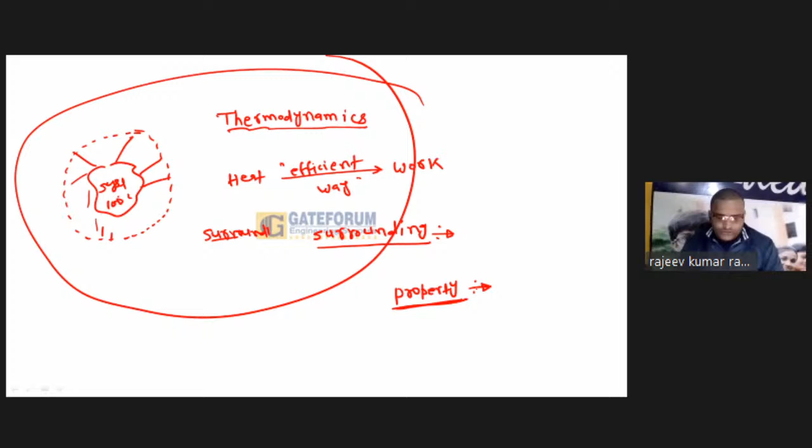No. So my dear friends, from today onwards, what you have to tell is that only those characteristics of a system which can be measured are properties. If a thing cannot be measured, it can't be a property of a system, or an engineering property. Yes, it is their property, but not an engineering property. So this thing you have to keep in mind: the characteristics which can be measured of a system are their property.

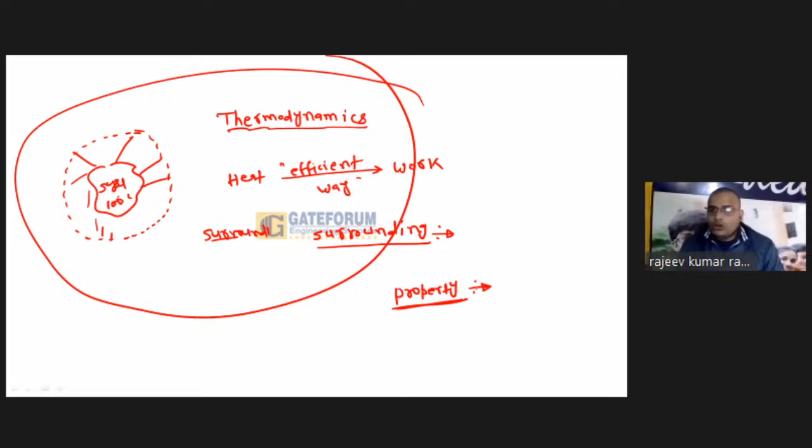So three things you can't measure: you can't measure taste, you can't measure smell, you can't measure color. So these three are not a property. Okay, you can measure temperature, pressure, volume, mass, enthalpy, entropy. Anything you can measure, all of that is property. Hopefully this is cleared.

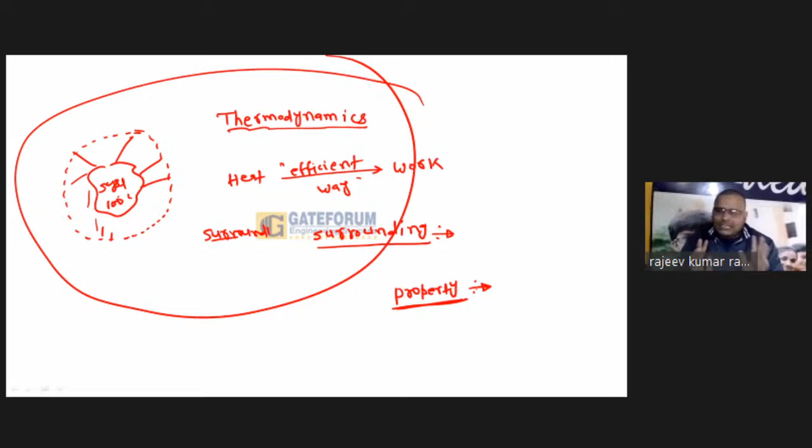So my dear friends, this is the basic definition. There are two types of property: one is extensive, and another one is intensive. And one more thing, property is always point dependent. It depends on the point only.

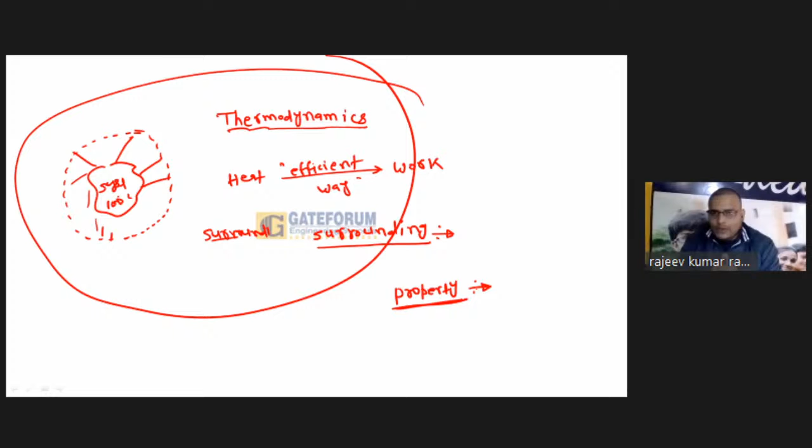Okay, so now take some question. Heat and work are - option A, intensive property; option B, extensive property; option C, point function; option D, path function. What should be the answer? If you have attended my session, then obviously you are well aware that heat and work are always a path function.

It is not a property. If not property, then I can't talk about intensive or extensive. So the answer is path function. Heat and work are always a path function.

Now tell me one thing: why is property a point function? Can you say why property is a point function?

Suppose I am making a PV diagram. Okay, this is our PV diagram. So can you say at this point some pressure will be P1, and this volume will be V1? As the point changes, property will change. Now if I talk at this point, then again volume will change and pressure will change. So this is called point function. Property is called point function because property will vary from point to point.

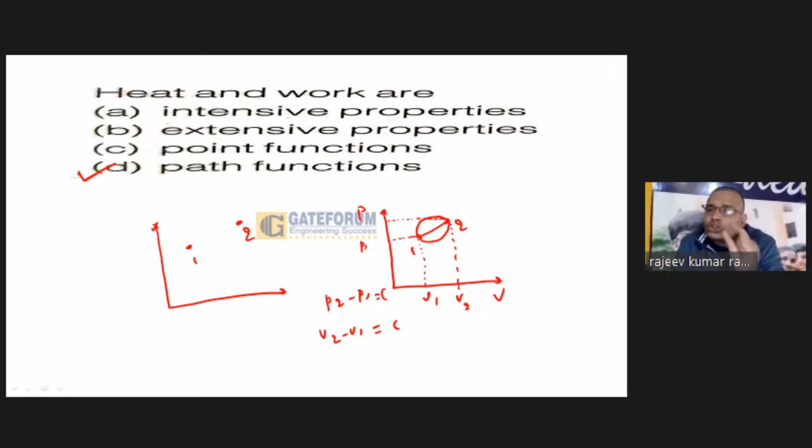But tell me, here this is our PV diagram. Yes, you have infinite ways; you can reach like that, like that, or like that. But if you talk about heat and work, they are not going to depend on the point only. Suppose you are going to follow this path, just wait.

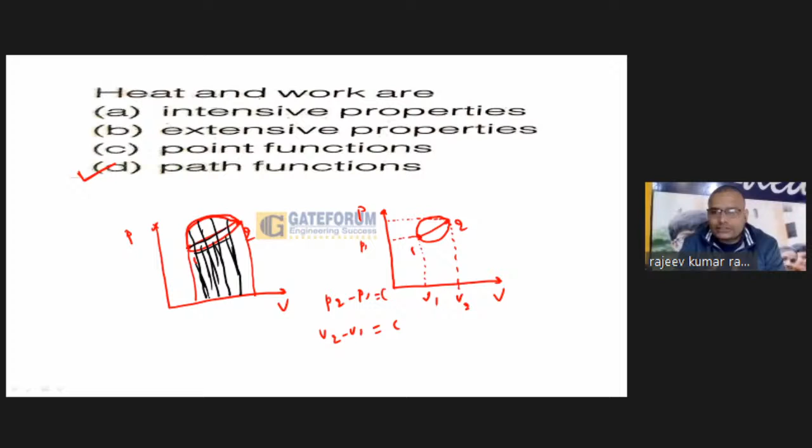Then we will say, sir, this area will give the work transfer. Because if you take another path, this path, then only this area. If you take this path, then only this area. So what is going to happen? It depends on the path, therefore it is called a path function, not a point function. Hopefully this is clear.

Now take this question. An isolated thermodynamic system executes a process. Choose the correct statement from the following. You know, in GATE 2021, MSQ, multi-select questions are going to be asked. So I have framed some questions as MSQ, multi-select questions. So what should be the answer of this?

An isolated thermodynamic system executes a process. Choose the correct statement from the following. Option A, no heat is transferred. Option B, no work is done. Option C, no mass flow across the boundary of the system. Option D, no chemical reaction can take place within the system. What should be the answer of this particular question?

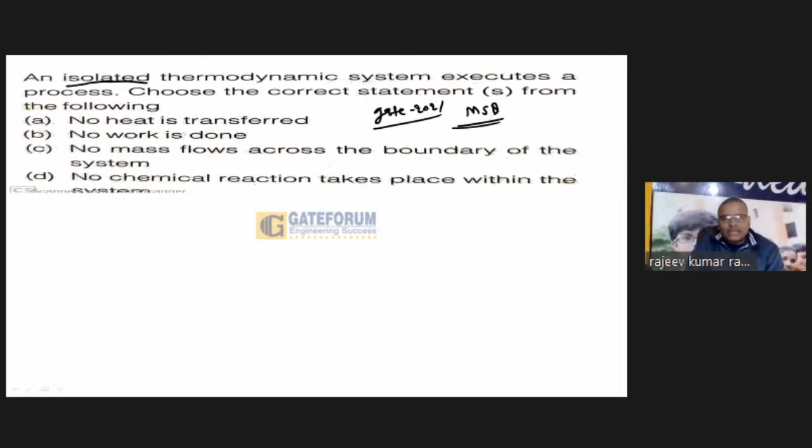See, an isolated system means what? In an isolated system, no heat is transferred. In an isolated system, no work is done or transferred. And if you talk about C, no mass flow across the boundary of the system. Yes, this one is also right. So if this is an MSQ, multi-select question, then the answer should be A, B, C. Now the question is, why is D wrong?

Why is D not a correct answer? No chemical reaction takes place within the system. Why is this wrong? Due to this "no", the whole statement is wrong. Suppose this is our insulated, isolated system. If an isolated system is there, that means no mass transfer, no heat transfer, no work transfer is going to take place.

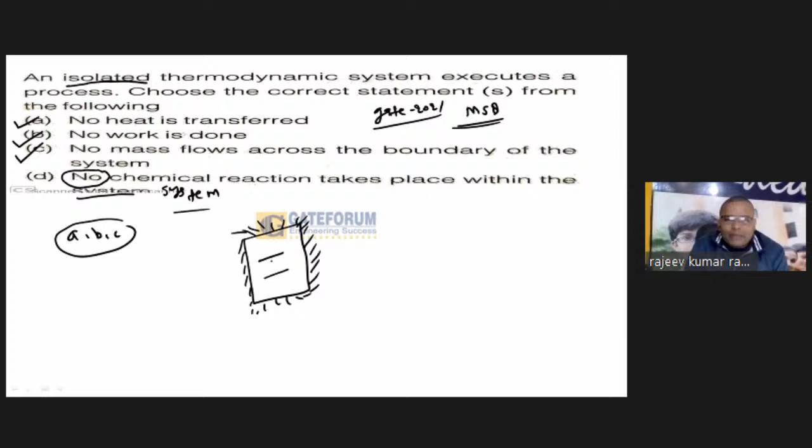Suppose there are two different substances and a chemical reaction takes place. Yes, it may be endothermic, it may be exothermic, but everything will stay inside, not go outside. The chemical reaction will not disturb the isolated condition of the isolated system. If it happens, no problem. Therefore, no chemical reaction is not a necessary condition.

If a chemical reaction takes place, it's still an isolated system, because a chemical reaction can be of two types: endothermic or exothermic. In one case it will absorb energy, in the other it will release energy, but whatever they do will be done inside the system only. Therefore this option is wrong. So the correct answer is A, B, C. Such kinds of questions you can expect this year as multi-select questions.

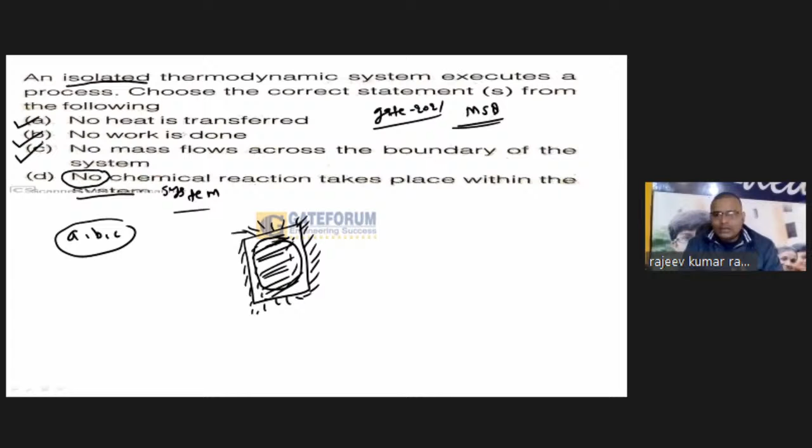Now see, which of the following statements are true with respect to heat and work? Again, this is an MSQ, multi-select question. What should be the answer? First, they are boundary phenomena. Second, they are exact differentials. Third, they are path functions. So what is the answer?

Generally students get confused and ask, sir, what is the meaning of boundary phenomena? What is the meaning of exact differential? What is the physical meaning of inexact differential? What is the physical meaning of exact differential? So in such problems, students ask us, what is an exact differential?

Try to understand this one, my dear friends. Suppose this one is a PV diagram, okay? Suppose two points are there: let this be point 1 and this one point 2. Now, if I ask, what will be delta P? You can say, sir, P2 minus P1. You can write delta P equal to P2 minus P1 directly, as a direct difference.

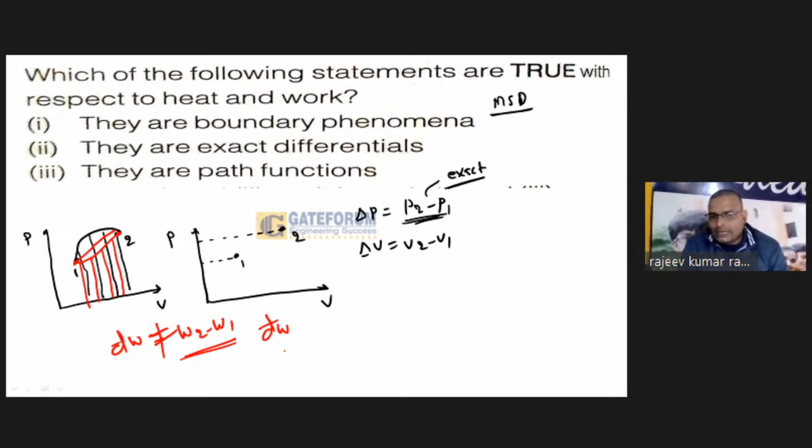Therefore it is called what? An inexact differential. Okay, are you getting this point? Whenever I use inexact, I write it like this, đW. Similarly, you can write đQ. This notation shows it is inexact. So the statement says they are exact differentials. No, with respect to heat and work, heat and work both are inexact, not exact. So statement second is wrong.

They are path functions. Yes, this is right. And first point, they are boundary phenomena. Yes, this one is also right. So what will be the correct answer? First and third are correct. So can you understand why they are boundary phenomena? Heat and work can be said only if energy is transferred across the boundary. Only in such a case can you say work or heat is transferred. If it does not cross the boundary, no heat or work happens.

Suppose I give you an example. Suppose this one is our system and energy is there. If this energy is not transferred across the boundary, then I can say there is no heat or work transfer. If this energy crosses the boundary, only in such a case we can say work or heat is transferred. Therefore, they are called boundary phenomena, because they have to cross the boundary. So, first and third is the correct answer.

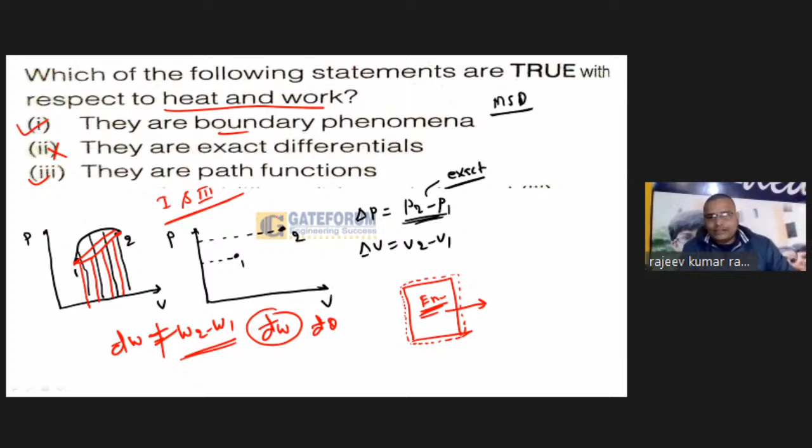Okay. During a non-flow thermodynamic process 1 to 2 executed by a perfect gas, the heat interaction is equal to work interaction, Q12 equal to W12, when the process is: option A isentropic, option B polytropic, option C adiabatic, option D isothermal. So what should be the answer?

My first question to all of you guys: tell me, what is the difference between perfect gas and ideal gas? Students get confused about what a perfect gas is and what an ideal gas is. Can you say what the difference is, or are they the same? Can you say what is the difference between perfect gas and ideal gas?

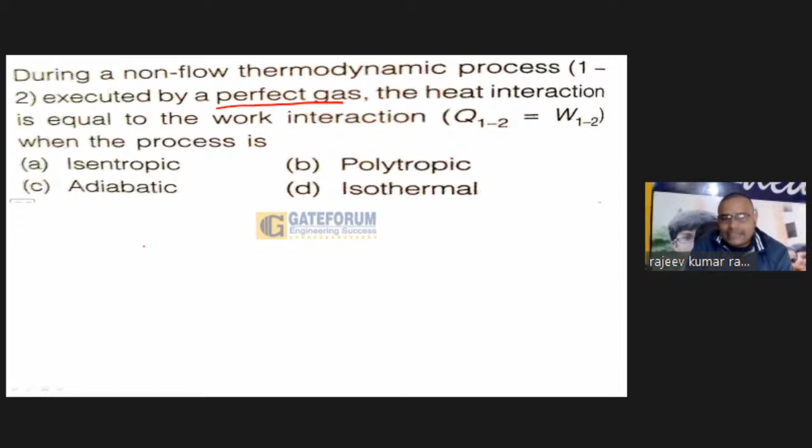Can anyone say what is the difference between perfect gas and ideal gas? Yes, try to understand this one, my dear friends. This is a very minor difference between the perfect gas and ideal gas. Try to understand this one. Suppose in case of ideal gas, Cp and Cv is a function of temperature.

This is told by Mr. Joule. This is told by Mr. Joule experimentally, that in case of ideal gas, Cp and Cv is a function of what? Temperature. Then it will be what? Ideal gas. So what is perfect gas?

Suppose Cp and Cv is constant, that means it is not going to vary with respect to temperature. Temperature is going to change, but there is no effect on the Cp and Cv. Then in such case, you can say that this is what? Perfect gas. That means we can say there is a minor difference between the perfect gas and ideal gas.

Thank you, Puja Pallavi. Thanks to all of you.

So in case of perfect gas, Cp and Cv remain constant, they are not going to vary with respect to temperature, then the gas will be perfect gas. In case of ideal gas, as temperature will change, Cp and Cv will change. So whenever you are talking about the perfect gas, it must come in your mind that Cp and Cv are constant, they are not going to vary with temperature. So this is the basic difference. Hopefully you are getting it.

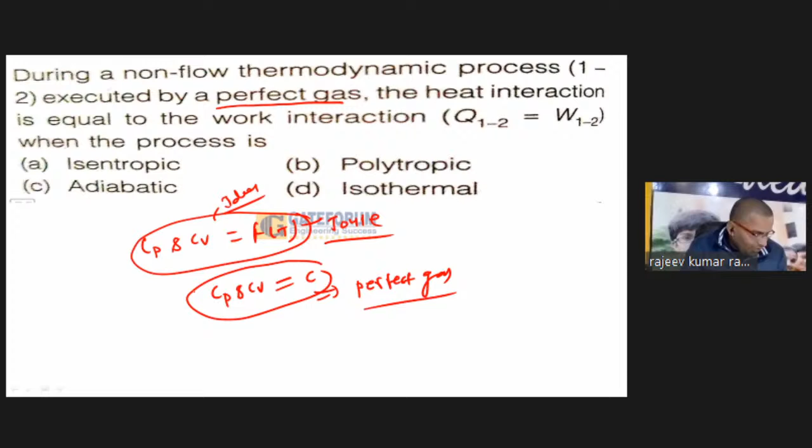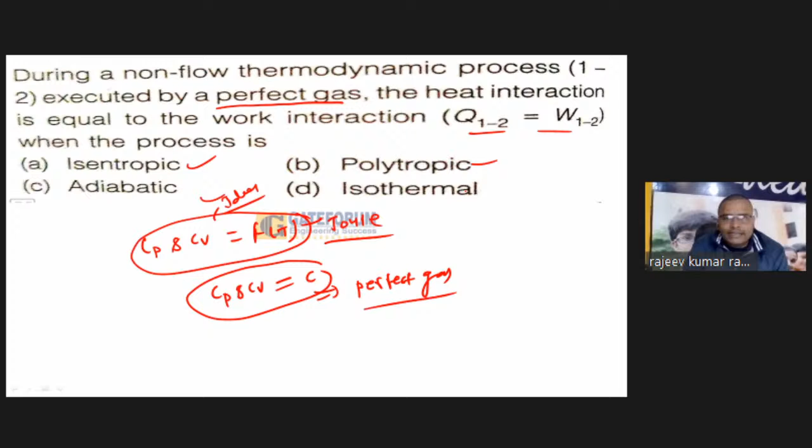Okay, so now tell me, options are isentropic, polytropic, adiabatic and isothermal. One important key point here: non-flow thermodynamics. Non-flow means closed. So if non-flow is there, you are well aware dQ equals dU plus dW. Because of non-flow, I am talking about the closed system, and for a closed system you can write dQ equals dU plus dW.

Now it is saying the heat interaction is equal to work interaction. That means dQ should be equal to dW. In which case? So dU should be what? Zero. If dU is zero, that means the change in internal energy will be zero. In such case you can say that dQ will be equal to dW.

And my dear friends, only one case is there in which the change in internal energy will be zero, and this is isothermal. I have discussed this many times in class. In case of an isothermal process, there is no change in internal energy. I have proved this in a detailed manner with a proper setup in class. So we can say in case of isothermal process, dQ equals dW.

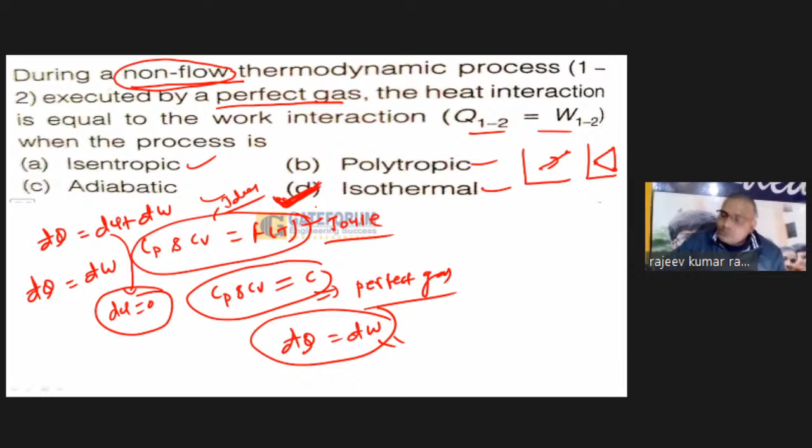Okay, so what will be the answer of this question? Okay, so we can understand this one. Just wait. Okay, so what should be the answer of this one?

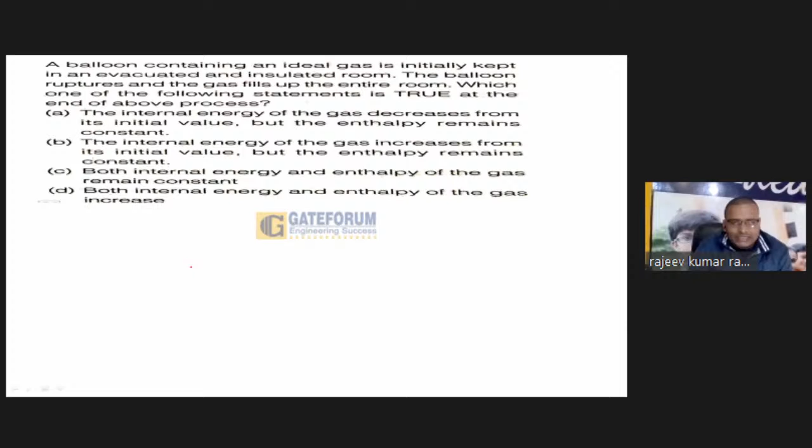This question is very easy. This is about your balloon, inside a room. It's an evacuated and insulated room. Evacuated means there is no mass inside the room, and it is insulated. The balloon ruptures, that means it is going to break, and whatever gas is inside the balloon is going to fill the room.

Then which one of the following statements is true? Now tell me one thing, my dear friends. If you talk about this, then what will be the work done? So this is our system, my dear friends, and it is insulated. Are you getting my point?

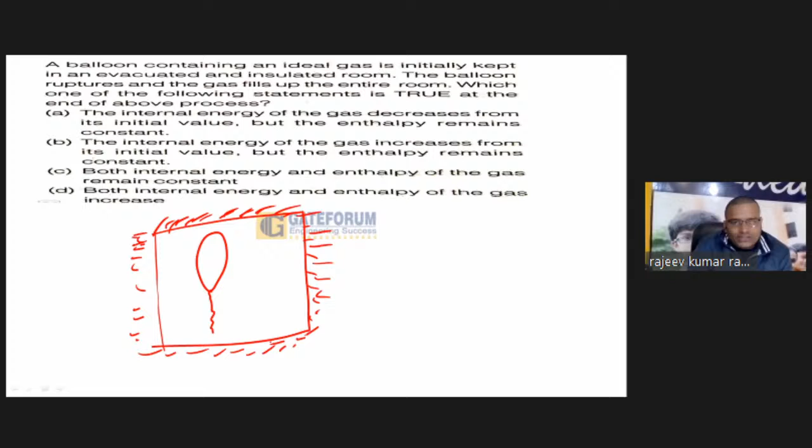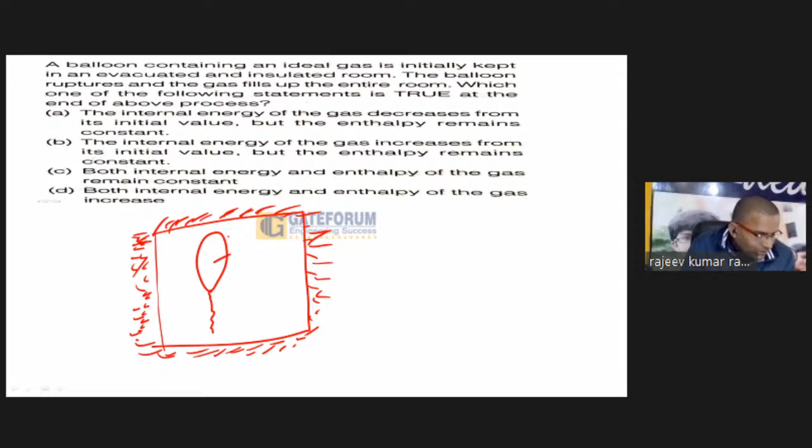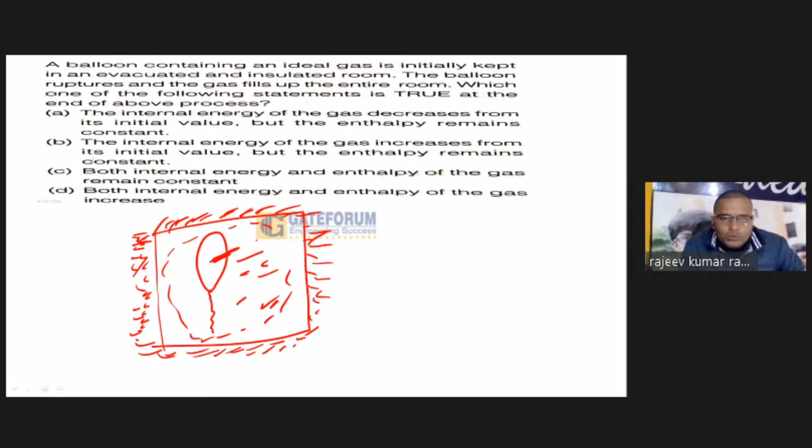It is insulated. So whatever energy is going to transfer from this balloon will be inside the room only. Why? It is insulated. Nothing is going to transfer across the boundary. Are you getting my point? If it ruptures, whatever energy is released will be inside the room only. It is not going out, because of insulation.

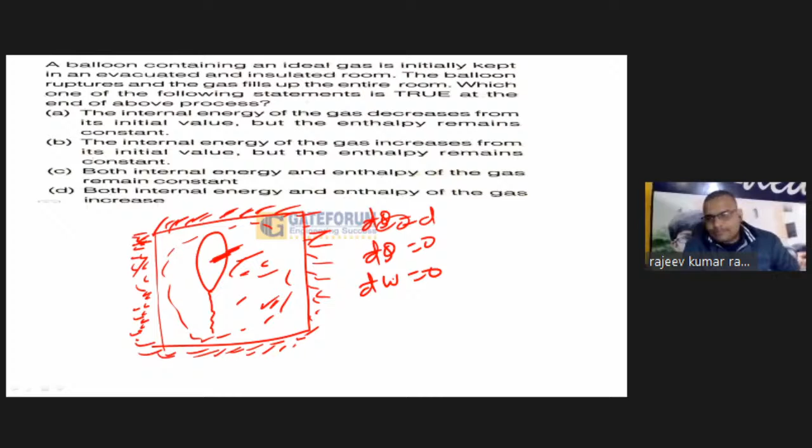So in such case, dQ equal to 0 and dW is also equal to 0. One more thing I will discuss. Since it is a closed system, you can write dQ equal to dU plus dW. Since dQ is 0 and dW is 0, we can say dU is 0. That means U1 equal to U2.

That means in such case internal energy will remain constant. This point is fixed. Internal energy is constant. Now if you see the question, some information is asked about the enthalpy also.

Okay, my dear friends, so try to understand, U1 equal to U2. Now suppose the gas is ideal. I am assuming the gas is ideal. If gas is ideal, you can write internal energy U as a function of temperature. So if dU equal to 0, we can write dU as m cv dT, so dT will be equal to 0, because mass can't be 0. Mass will be something.

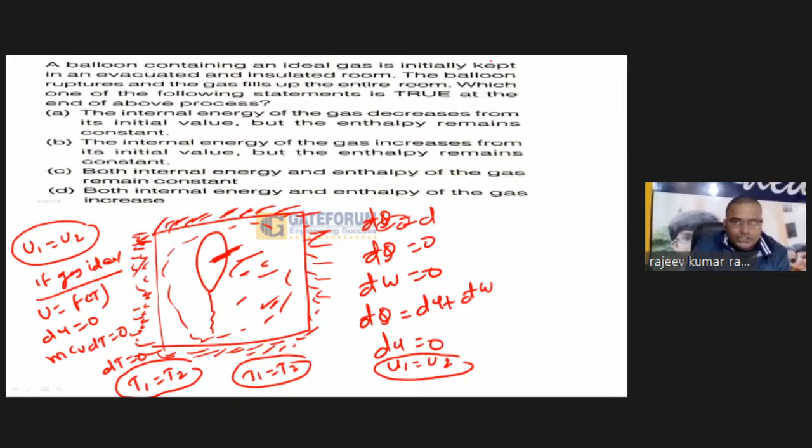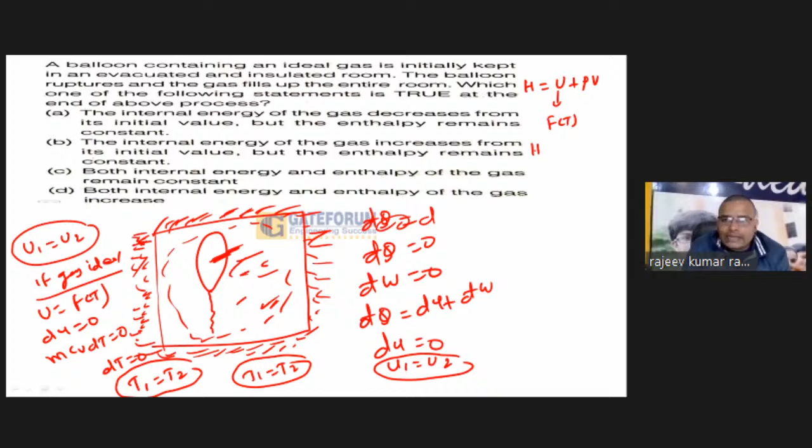Okay, now again, what if you talk about H, enthalpy? What is enthalpy? U plus PV. And in case of ideal gas, U is a function of temperature. PV you can write as mRT. Mass is given for a closed system, and R, the characteristic gas constant, is constant for any particular gas. So U is a function of temperature, and all this quantity is a function of temperature. So we can say enthalpy is also a function of temperature.

But my dear friends, in this case the initial and final temperature is same. That means initial and final enthalpy will also be same, because temperature is not going to change at initial and final condition. So my dear friends, what should be the answer? Both internal energy and enthalpy of the gas remain constant. So option C is the correct answer. Someone has given option D. How are you going to think? Option C is the correct answer.

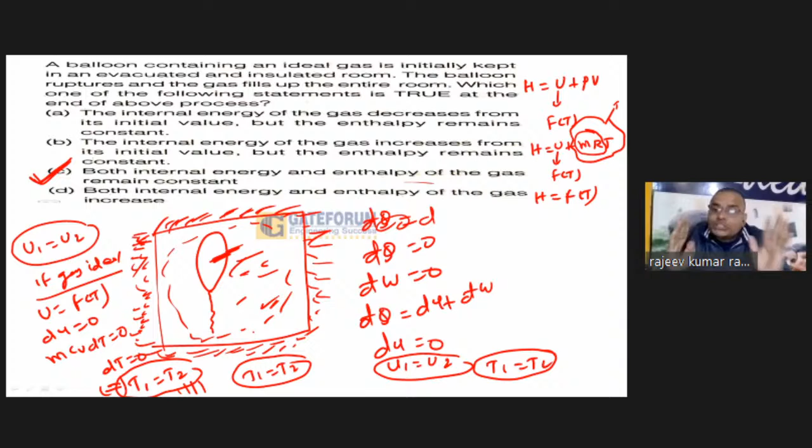One more thing, my dear friends. Sometimes in MSQ, a student gets stuck. Sir, here T1 equal to T2; if ideal gas, that means isothermal also. So the student is going to confuse. No, my dear friends, don't make such kinds of conclusion. Here only initial and final temperature is same, but intermediate temperature is not same. For a process to be isothermal, initial, final, as well as intermediate temperature must be same.

So it is not isothermal. Why? Because here only initial and final temperature is same, but intermediate temperature is going to vary. Are you getting this point? So it is not isothermal. So never confuse.

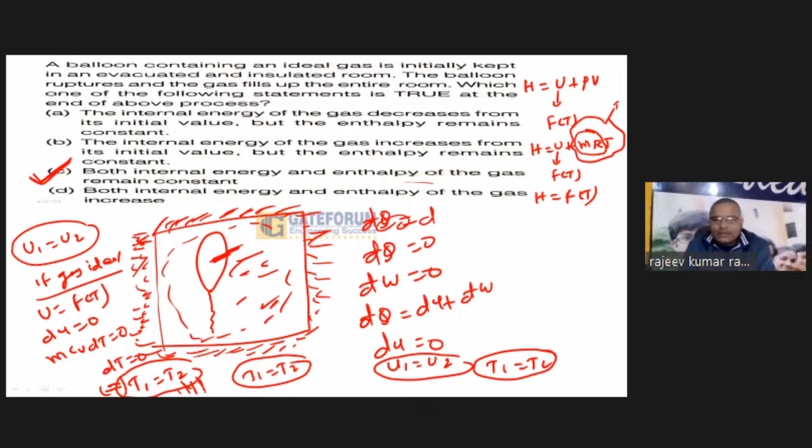One more thing I want to tell you. U1 equal to U2 will be for any gas; internal energy will be equal in any gas. But enthalpy will be constant only if the gas is ideal or perfect. Sometimes students memorize: if throttling or free expansion is there, internal energy remains constant, temperature remains constant, enthalpy remains constant. But you have to keep proper assumptions. Internal energy will be same always, but enthalpy will be same only when the gas is ideal. If gas is not ideal, you can't conclude like that.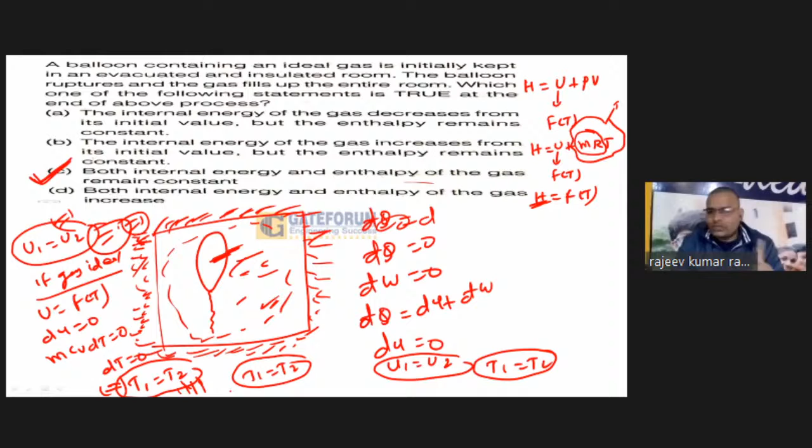Okay, so these are some questions that you can expect in your coming exam. Okay, so take this question.

Thank you, Guddu. Julie.

A steam flows through a nozzle at a mass flow rate of m dot equal to 0.1 kg per second with a heat loss of 5 kilowatt. The enthalpy at the inlet and exit are 2500 and 2350 kilojoule per kg respectively. Assuming negligible velocity at inlet, that means C1 equal to 0, the velocity C2 of the steam in meter per second at the nozzle exit is, correct to two decimal places. So this is a NAT, numerical answer type question. So how can we solve it?

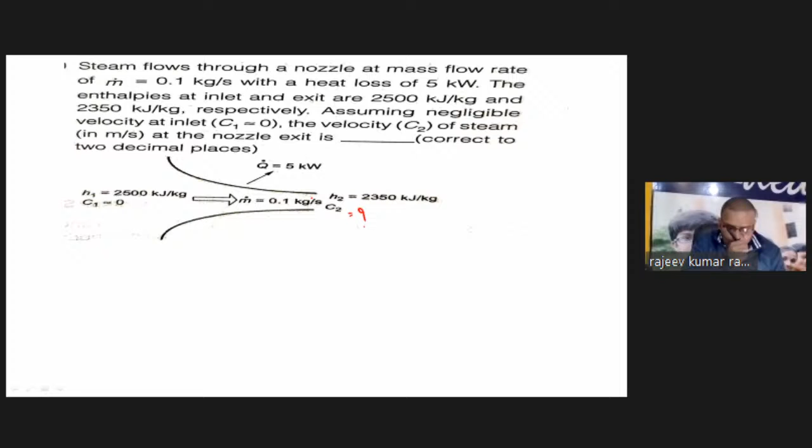In this question, H1 equal to 2500 kilojoule per kg. Velocity at the inlet is 0. Mass flow rate is 0.1 kg per second. Enthalpy at the exit is 2350 kilojoule per kg. You have to calculate C2, the velocity at the exit. And heat is lost from the nozzle, and its value is 5 kilowatt. So how can we solve this question? Just wait.

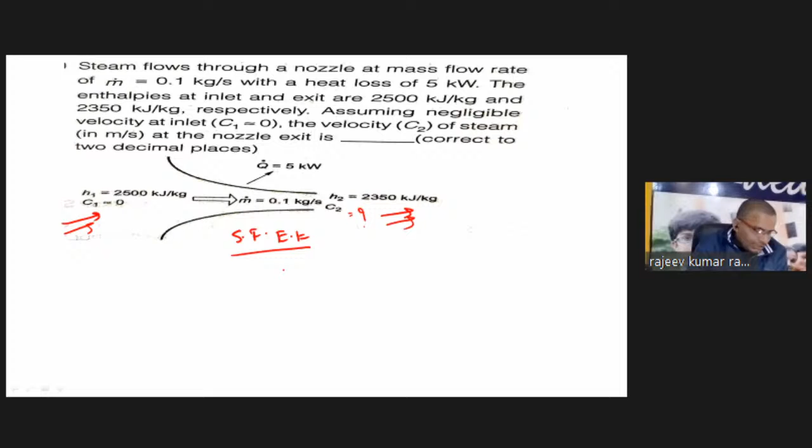So steam flows through a nozzle at mass flow rate - what is this? This is steady flow, because mass is going to transfer, heat is going to transfer, so you have to apply the SFEE, that means the steady flow energy equation. So what is this one?

You can write: m times h1 plus half c1 square plus gz1 plus q dot equals m times h2 plus half c2 square plus gz2 plus work done.

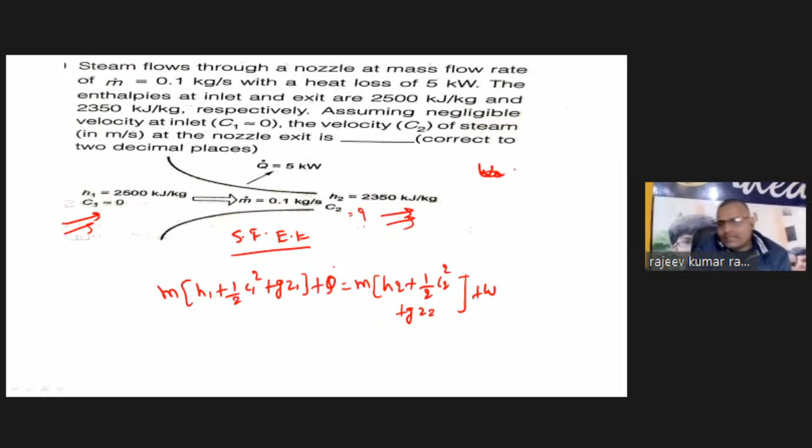So in this question, mass flow rate is given, h1 is given, h2 is given. Assuming negligible velocity at inlet, c2 is the velocity of the steam at nozzle exit. One more thing to keep in mind: in case of a nozzle, work done will be zero.

But here heat is going to transfer, so you can write h1. What is the value of h1? 2500. c1 is negligible, so you can neglect it. Also assume that change in potential energy is negligible, because this is horizontal. So change in potential energy, gz1 minus gz2, is approximately negligible since it's horizontal, so you can neglect this.

So in general, making a general discussion, you can write m h1 plus q equals m h2 plus half m c2 square. So what is the value of m here? 0.1. What is the value of h1? 2500.

Now tell me one thing: heat is going out from the system, it is not going inside the system, it is going out. So you can write a minus sign here, because it is going out.

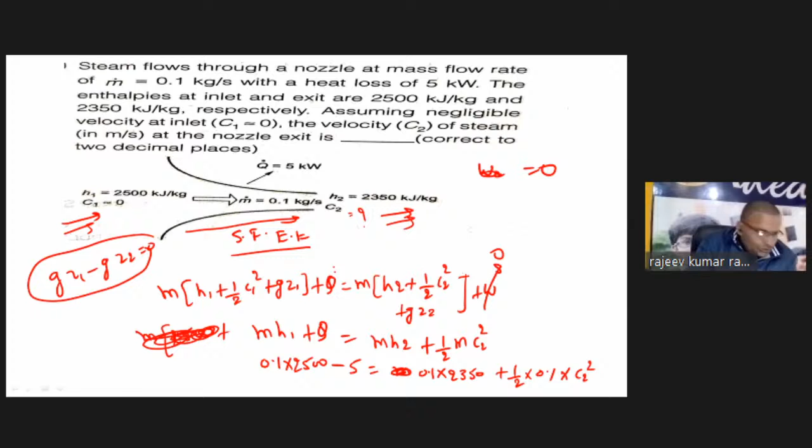So you can write: 0.1 times 2500 minus 5 equals m, that means 0.1 multiplied by h2, which is 2350, plus half times 0.1 times c2 square. If you solve this, we will get the value of c2, and this value will be 447.213 meter per second. By solving this you will get this value.

One more thing I want to tell you: sometimes in the exam, h1 is given, suppose let's assume 200 kilojoule, and v1 is given as 10 meter per second. And again assume h2 is given, let's say 300, and v2 is given, let's assume 20 meter per second. So if you are going to apply the steady flow energy equation...

What will happen, let's assume per kg, that means I am taking mass as 1 kg, so you can write: h1 plus half c1 square plus gz1 plus q equals h2 plus half c2 square plus gz2 plus w.

So what's happened, my dear friends, see what is the unit of h - it's kilojoule. Unit of h is kilojoule. But if you talk about the unit of velocity, it's only meter square. So are you getting the point? So it's better to write h1 plus half c1 square multiplied by 10 to the power minus 3.

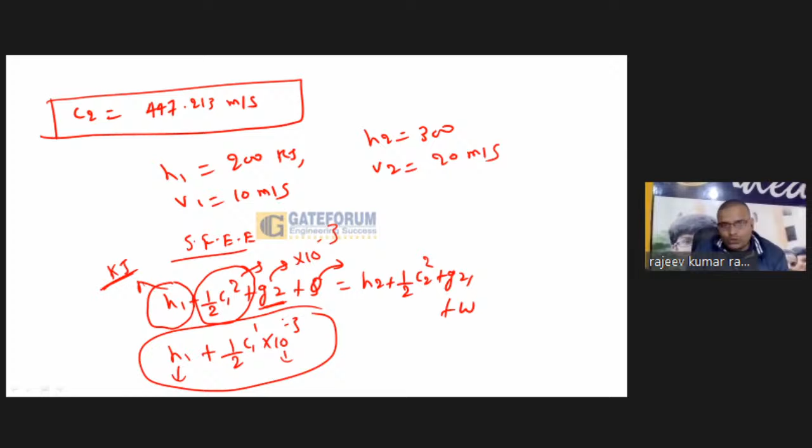At the same time you can multiply, this one is also 10 to the minus 3, because this unit there is no kilo, but here this will be given in kilowatt, so no issue is there, kilojoule whatever will be there. So this thing will be given, so no problem will be there. You have to keep this in mind in the main exam, otherwise you will get the wrong answer, and mostly option A will be the answer that you get, and this will be the wrong answer.

So now can you take this question? A compressed air bottle of volume 0.15 meter cube contains air at 40 bar and 27 degrees Celsius.

It is used to drive a turbine which exhausts to atmosphere at 1 bar. If pressure in the bottle is allowed to fall to 2.0 bar, find the amount of work delivered by the turbine. I think this type of question, something different, not a single time till now has been asked in the GATE exam. Hopefully I think in the coming exam such kinds of questions can be framed, especially by IIT Mumbai.

Such kinds of questions you can ask. So try to understand, try to solve this question. So what is this question, my dear friends? Just wait. A compressed air bottle of volume 0.15 meter cube contains air at 40 bar and 27 degrees Celsius. Suppose this is your bottle.

Let's assume you can write, so this thing is your bottle. Okay, this is your bottle. So in this, volume is given, you can say volume is 0.15. Pressure is highly compressed air there, highly compressed, how much? 40 bar. That means inside this bottle pressure is highly compressed, and this value is 40 bar, and temperature is only 27 degrees Celsius.

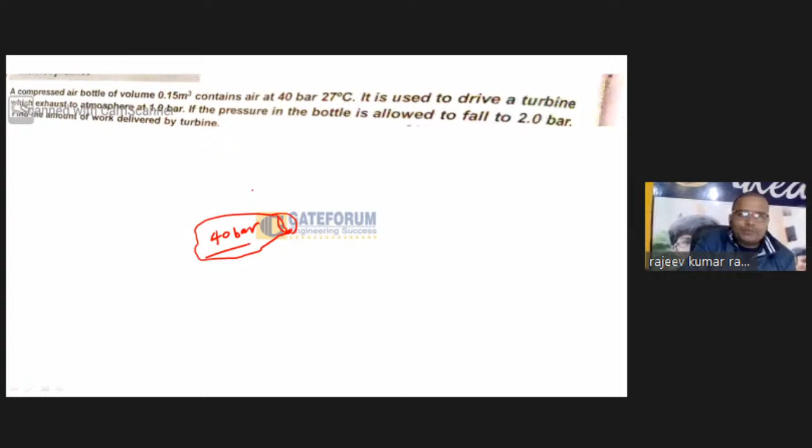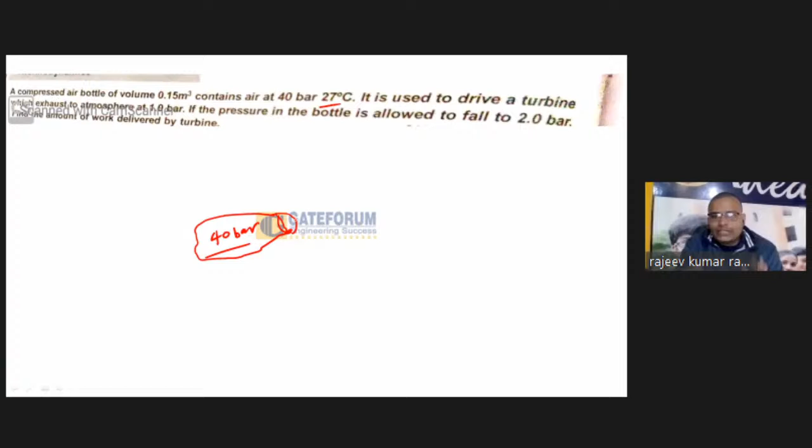Now it is used to drive a turbine which is exhausted to the atmosphere at 1 bar. That means with the help of this bottle, a turbine is going to be connected. Suppose this is the turbine. This turbine is going to be connected.

Now the question is that if the pressure of the bottle is allowed to fall, that means whenever you open the tap of the bottle, since it is highly compressed, what will happen? Forcefully it will move to the turbine, and it will strike the turbine blade at very high velocity. As it strikes the turbine blade, what happens? The turbine blade starts rotating. If the turbine blade starts rotating, that means you are going to get rotational work.

So here you have to find the amount of work delivered by the turbine, that means how much amount you can get at the outlet of the turbine. So my dear friends, tell me how we can solve such kinds of questions. I think this is very very important for your exam.

So first tell me, what is the mass inside the bottle initially? So you know, it is air, so air is an ideal gas, you can treat it as such. So you can write PV equal to MRT. Suppose P1 V1 equal to M R T1. So you can write M1 is P1 V1 upon R T1.

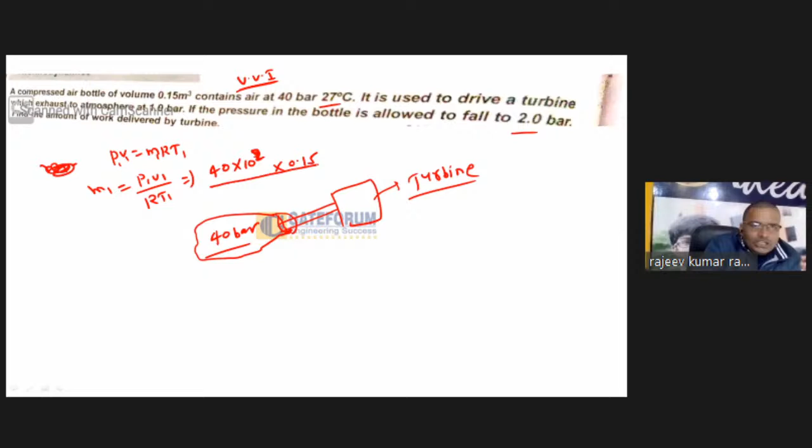What is P1? 40 bar, so 40 into 10 to the power 3, it will convert into kilo. Actually 10 to the power 2 only, not 3. What is the volume? 0.15. You have to write R as 0.287. What is temperature? 300. So by solving this, we will get this value. So in the initial case, initially 6.97 kg of air is compressed inside the bottle.

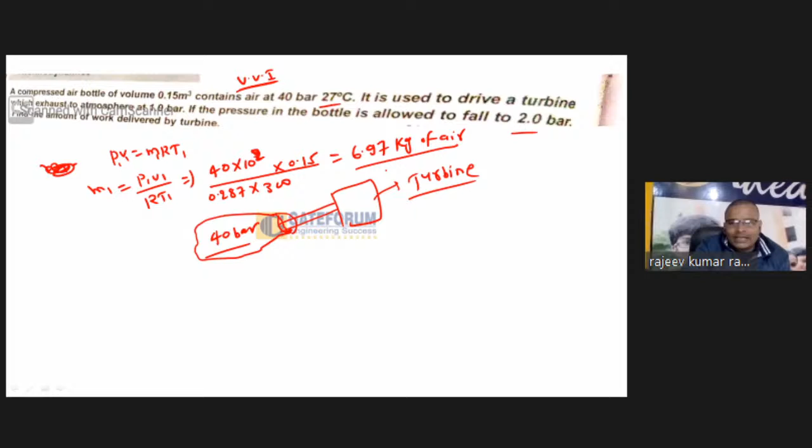Now, if you talk about the second case, okay, if you talk about the second case.

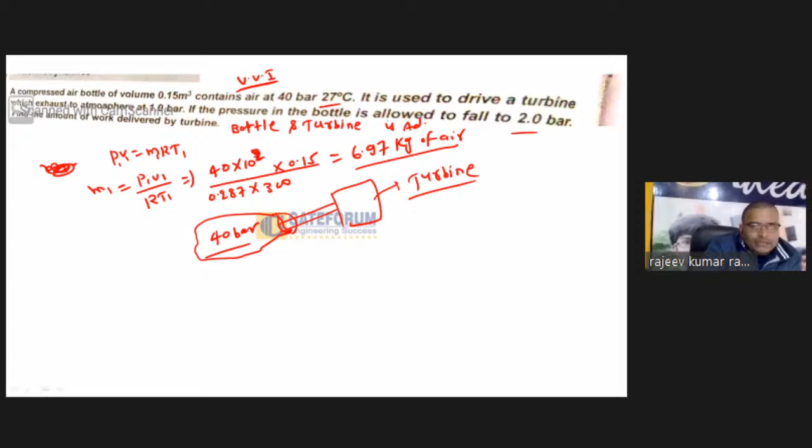One more thing given here is that the bottle and turbine is adiabatic. This is given here in the question, the process is adiabatic.

So you can write T2 upon T1 equal to P2 upon P1, power gamma minus 1 upon gamma. Can you find T2 from this? Yes, you can write T2 upon T1 this way.

So what is the value of P2? Initially how much pressure? It falls to 2 bar, that means pressure inside the bottle will be 2. Initially this was 40, since it falls here, so you can write 1.4 minus 1 upon 1.4. And T1 you have given as 300. T1 is given, so you can write T2 equal to 300 into 2 upon 40 whole power 0.4 upon 1.4. If you solve this, you will get the value of T2.

This will be 127.5 Kelvin. That means you have got T2.

Now tell me one thing, what will be the value of M2, what will be the value of mass? So you can write M2 equal to P2V upon R T2.

P2V upon R T2. What is the value of P2? You know 2 into 10 to the power 2. What is the volume? Same bottle, 0.15. What is the value of R? 0.287. What is the value of T2? This is 127.5. If you solve, you will get the value of M2. This value will be 0.82 kg.

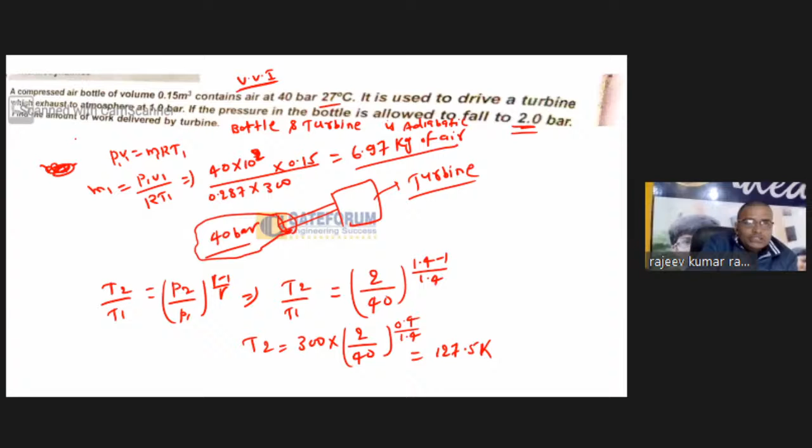Now tell me one thing, why am I going to calculate M1 and M2? Have you considered why I am calculating M1 and M2? Why is it necessary for us to calculate this one? My dear friends, this is the case of unsteady flow. And how are you going to identify that this is the case of unsteady flow?

If you have attended our session, I have told you whenever there's a key point in the question, whenever you are going to fill water, that means as time passes, the property of the fluid is going to change. It will be changed, and whenever any property is going to change with respect to time, it will be unsteady. Filling a bottle, or emptying a bottle, or filling of air inside a balloon - these are all key points through which we understand this is a question of unsteady state.

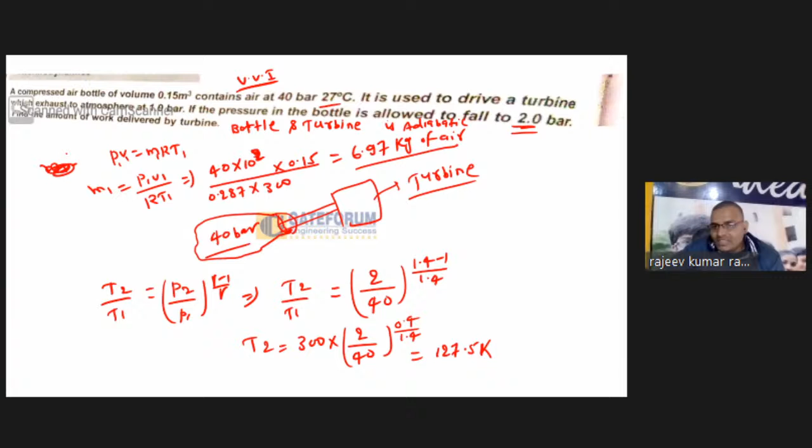So in case of unsteady state, if you have attended the session, you are well aware: M2U2 minus M1U1 equal to minus of M2 minus M1, into H minus W. This is the equation you will get, and that is why I have calculated M1 and M2 here.

Now you have got M1 and M2. Now tell me one thing, you have to calculate internal energy also. So how can we calculate this internal energy? You know what is U2?

You can write U2 equal to CV into T2. So what is this value? 0.718.

CP, CV, R - this thing we have to remember forever, this data will not be given in the question. You know CP is 1.005, CV is 0.718, R for air is 0.287 kilojoule per kg Kelvin. This data you have to always remember. All these are in kilojoule per kg Kelvin.

So T2 in what Kelvin? 127.5. If you use this, what will be U2? This will be, I think, 91.54 kilojoule per kg. Similarly, you can calculate U1.

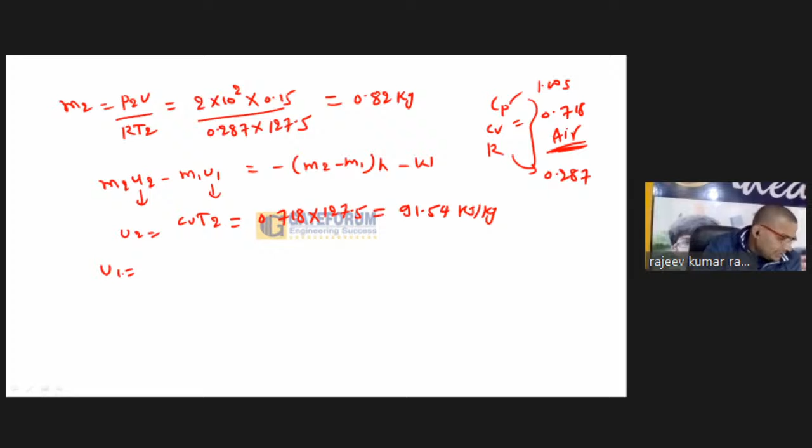What is the value of U1? You can write CV T1, and if you calculate, 0.718 into T1 which is 300, you will get 215.82 kilojoule per kg.

Now in this case you have to calculate work. What do you have to calculate? You have to calculate work. So first you have to calculate the enthalpy. Once you get the enthalpy, you will get all the things. So how can we calculate H?

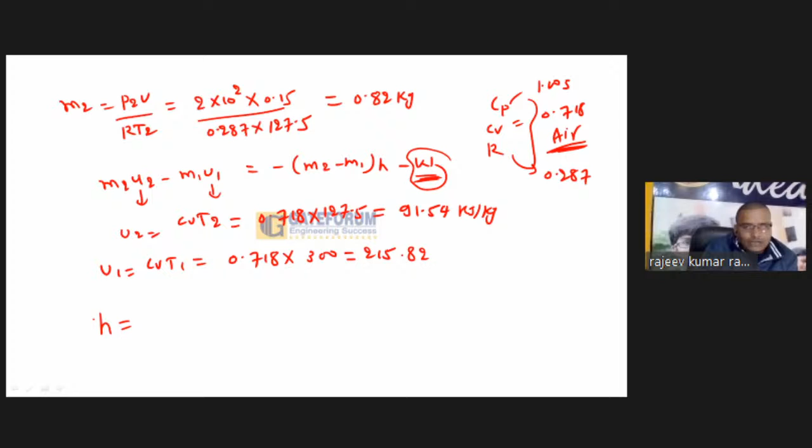Average enthalpy you can calculate, you know CP T. So one thing we can do: calculate H1 as CP T1, calculate H2 as CP T2, and finally take the average. So the value H1 plus H2 upon 2, this average value you have to take. Better to write it as CP common, T1 plus T2 upon 2.

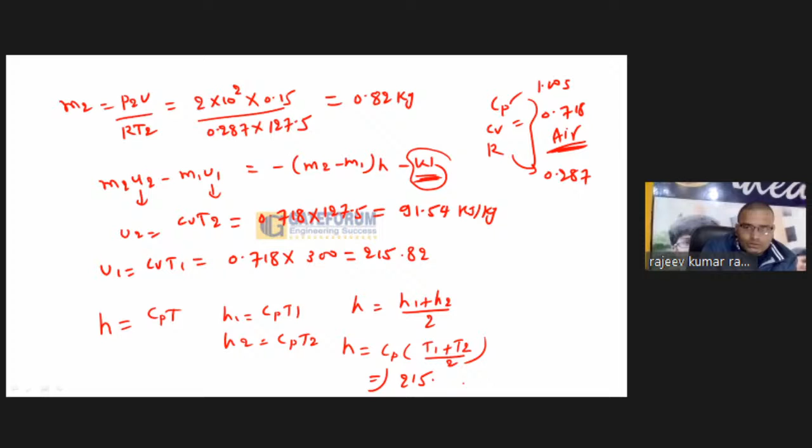And if you solve this, you will get this value equal to 215.4 kilojoule per kg. So you have calculated H1, and you have calculated it.

Or another thing we can do: calculate H1 separately, calculate H2, and then we can take the average. It's the same, you will get the same. Okay, so by solving this, we will get the value of H as 214.82.

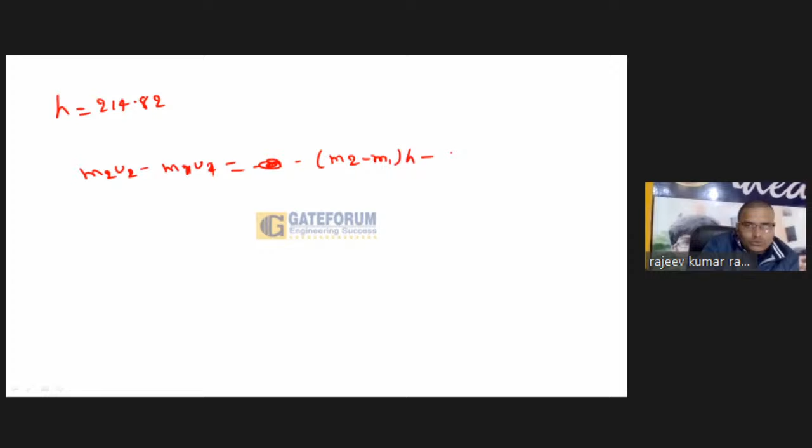Okay, now what you have to do: m2 u2 minus m1 u1 equal to minus, you can write, m2... m1 u1, m2 minus m1 h minus W. Okay, now you just have to put all these values, m1, m2, and after putting these values we will get the value of W, and this will be equal to 2747. You can write W equal to 2747.44 kilojoule. So we will get the answer, this one.

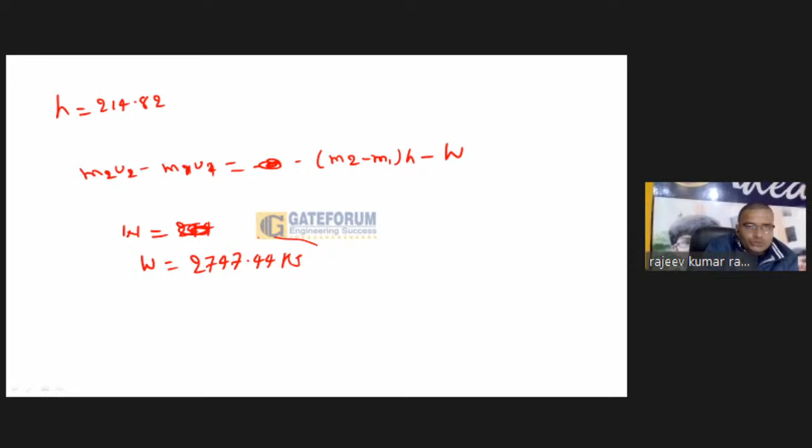So you have to remember some key points. In case of unsteady, suppose whenever you are going to fill an empty vessel, an empty cylinder, you have to fill the gas inside the empty cylinder, then you can understand that this question is asked using the unsteady state concept. Okay, you are going to fill a balloon, that means you are going to fill the air. The balloon will inflate, so its property will change as time passes, so it will also be unsteady.

Third thing, suppose anything is emptying, like the question I have discussed here, this one is a bottle. Assume this is your bottle, and it is going to empty. Then as time passes, the property of the fluid inside the bottle will change, so it will be unsteady. Why? Because if the property changes with respect to time, it will be unsteady. So these three or four points you can keep in mind, so you can understand which one is steady or which one is unsteady.

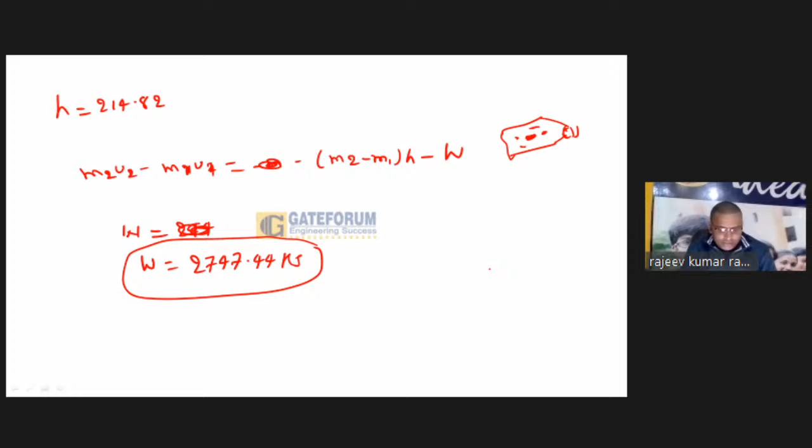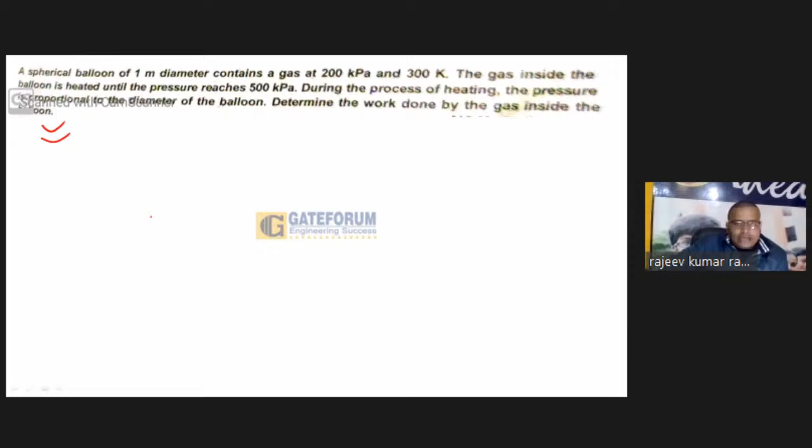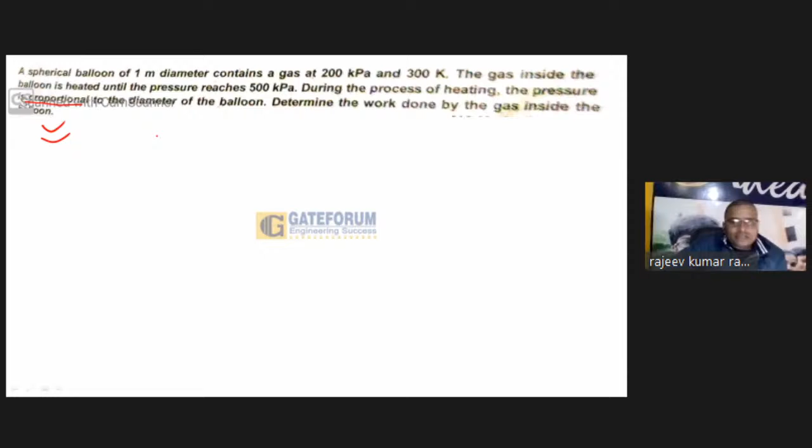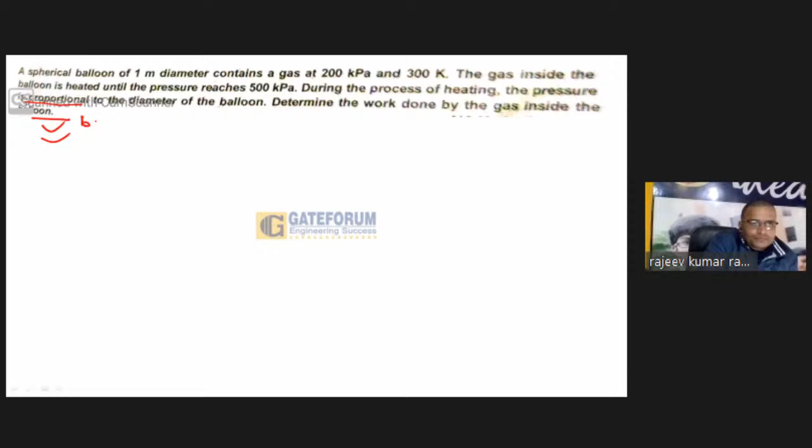Okay, my dear friends, now this is your practice question. Try to solve this question. If you get stuck, then let me know. In the coming session, I will discuss this question. The question is: a spherical balloon of 1 meter diameter contains a gas at 200 kilopascal and 300 Kelvin. The gas inside the balloon is heated until the pressure reaches 500 kilopascal. During the process of heating, the pressure is proportional to the diameter of the balloon. Find the work done by the gas inside the balloon. So try to solve this question. If you get stuck, then let me know. In the next class I will solve this question.